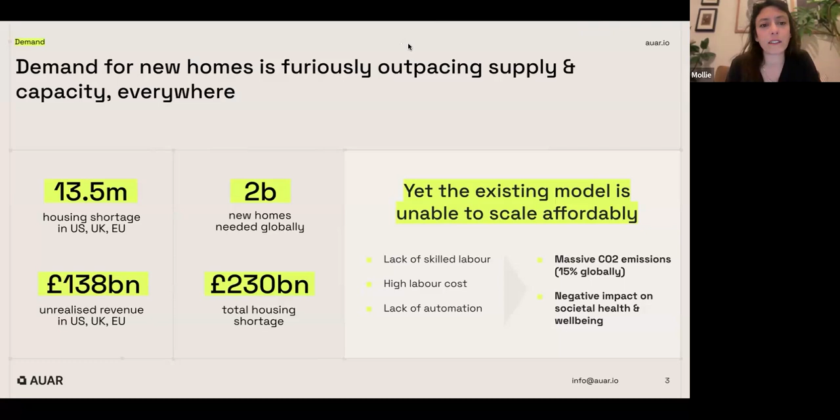And what that results in is known problems around CO2 emissions in residential construction, but more broadly, the problem around the social sustainability in terms of societal impact, societal health and well-being, and the impact that this housing shortage has.

And then if we look at solutions that have been kind of big promises to the industry, but have failed and have had billions and billions of pounds or dollars invested in them, we can look to the large modular centralized factory as a model that we're directly positioning ourselves against.

And the primary problem really with these kinds of approaches where you have a large modular factory is that they have a myriad of reasons for failure, but the ones that we've identified as some of the biggest problems are that they have a very, very high capital expenditure attached to those factories. They cost a lot to set up, and they also cost a lot to run.

And then if you look at the outcomes from these factories, you see zero cost savings in comparison to traditional methods. And part of the reason why this is problematic is because the business model for these factories requires a very standardized pipeline to be run through them, but also a continuous pipeline in order to meet the needs of those OpEx and CapEx overheads. And this is obviously in a kind of direct contrast to the construction industry, which is cyclical and in a way very agile already in that it adapts to changes in supply and demand.

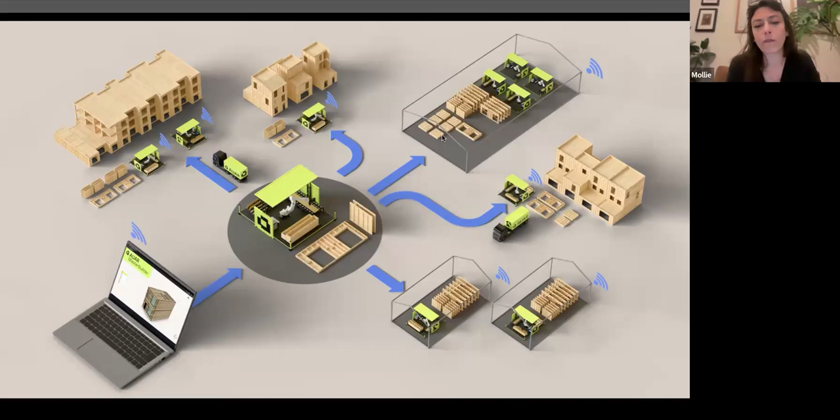So I'll go into these aspects of our business in more detail, but essentially we've developed a software approach that powers a robotic microfactory that can be deployed in small infill factories or in larger factories, or can be deployed directly on sites, allowing our customers to be able to adapt the financial needs of their business to the way that they develop and build, which we think is a really agile way of delivering homes in relationship to the more normative ways and much more in line with how the industry operates.

So our software and hardware solution is really a full value chain automation solution. We have a software platform called Master Builder, which is a cloud-based platform for design to manufacture of timber homes that then creates the manufacturing data for our robotic microfactories, which is a plug-and-play microfactory, and rented to our customers in a kind of no capex business model where they essentially pay us a per square meter or per square feet fee in order to operate those microfactories, and has a very low OpEx. And I can go a little bit more in detail about exactly what that means.

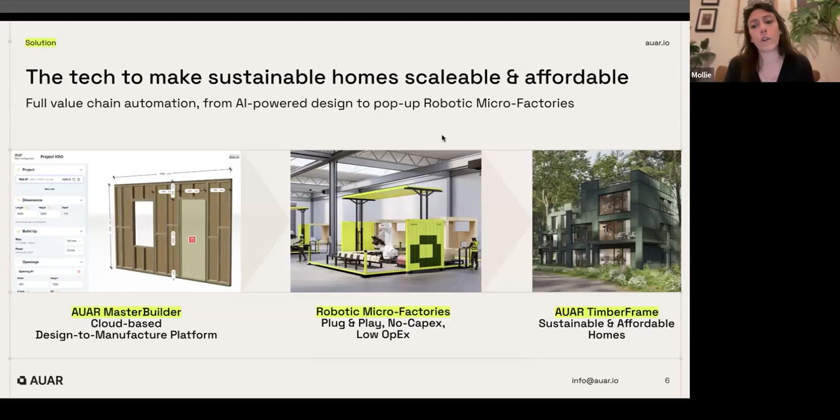And the result of that is that our customers are able to use the backbone of all of this, which is our approach to timber frame construction, in order to deliver really low energy or net zero homes that are also affordable and kind of aggressively below market cost. So I'm just going to show you what Master Builder looks like.

So Master Builder, currently we're the internal users of Master Builder, and essentially Master Builder has a couple of parameters that feed into it. One is our building system approach to timber frame construction, which you can see some of those defaults being set there. And then it also takes in supply chain information from our customer supply chain to set a pricing template. And then it can be powered through this pricing template to be adapted to any kind of costing that's needed,

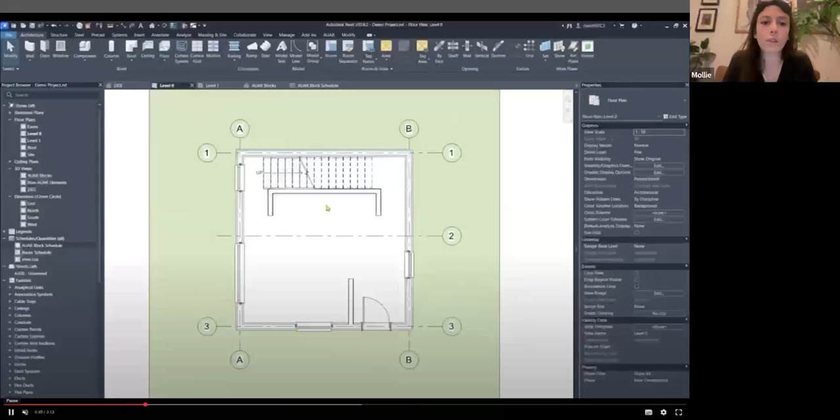and can be deployed into industry standard software such as Revit, for example, here, where essentially you take a design from an architect or a home builder with very baseline information, like minimal sizing that's been done. You can use Master Builder to then essentially have it tell you where in that design there are errors in terms of making this data that can be used to manufacture using our hardware.

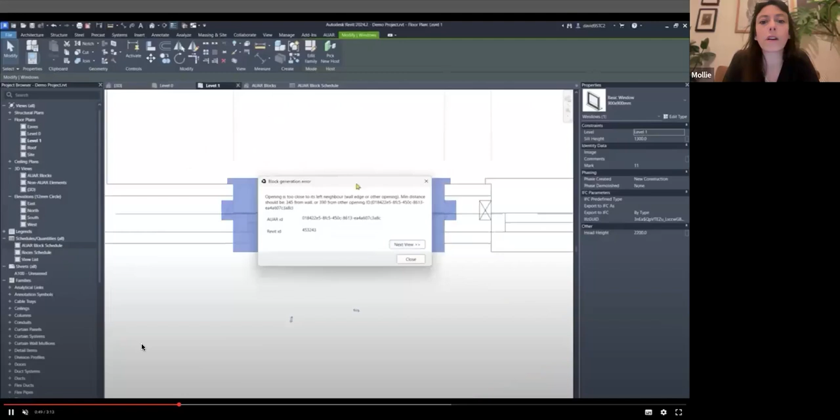And so, for example, here, Master Builder is telling the user that one of the openings is too close to its neighbor, and you need to adapt the design in order to make it into manufacturing data. We're at the moment pretty close to automating this optimization in real time and creating a list of optimizations that have happened after that's occurred. And then essentially what it's doing now is creating that manufacturing data in about 5 seconds.

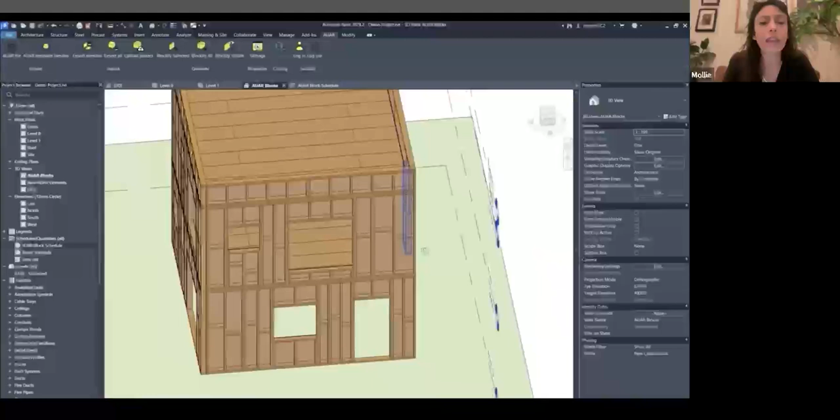So you can see here the timber frame is produced pretty much automatically, and it uses structural constraints as well as building code regulations for timber frame construction to be able to create that information. And you can see here the data that it produces in line with the building code assigned to it, the pricing template assigned to it in regards to the supply chain, as well as the structural and design parameters involved.

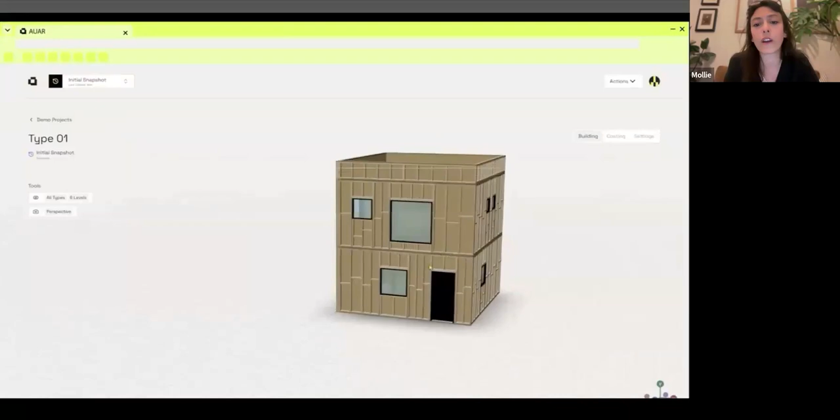And then that gets pulled back into Master Builder, where you can see there's a kind of product library of existing designs that we've been working on, and essentially creates that project, and it can exist forever in Master Builder as a product that can be deployed with a full costing, full bill of materials, building quantities down to the nail for that specific project. So you can kind of see that scanning through there.

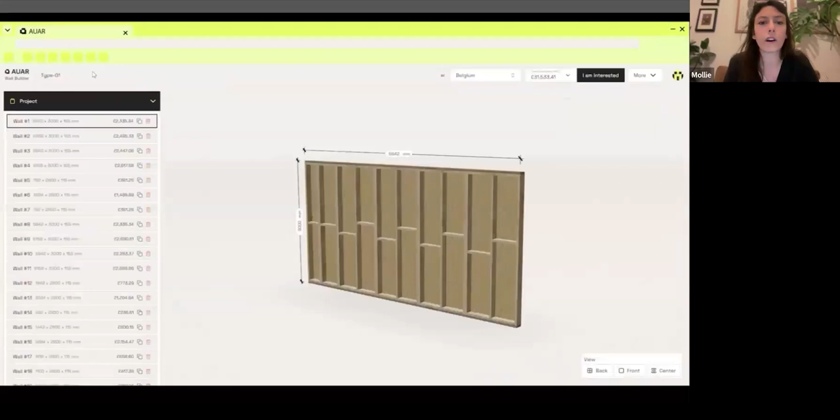And then you can go and get those building quantities down to the individual elements that are being created for the manufacturing data. And then you can scan into that on an even more granular level through a part of our microservices in Master Builder called Wall Builder. We can go in and adapt the design even more specifically to individual walls.

And I'll talk a little bit more about how we've used Wall Builder to start building an AI-ready platform later on in the presentation. And this is all with real costings in relationship to the supply chain for our customers as well, so they can see that in real time.

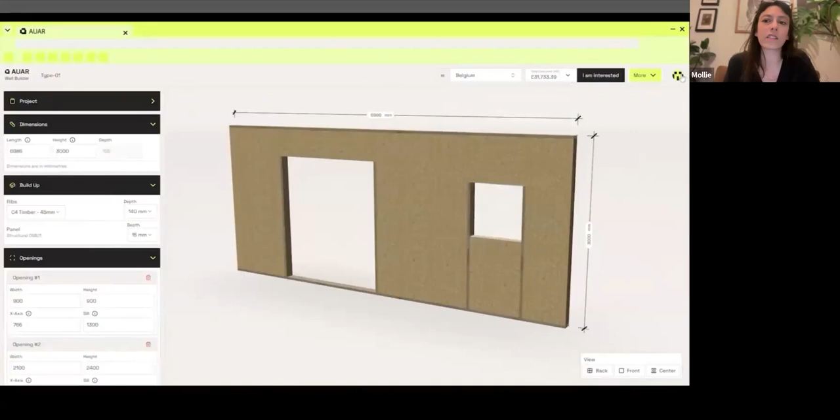And then importantly, the link here to the manufacturing is that this is all pure manufacturing data already. And so it streamlines itself directly to our robotic platform as well, which is going to just show you in a minute the manufacturing data that it creates, which is all code for the robot to operate and build that timber frame.

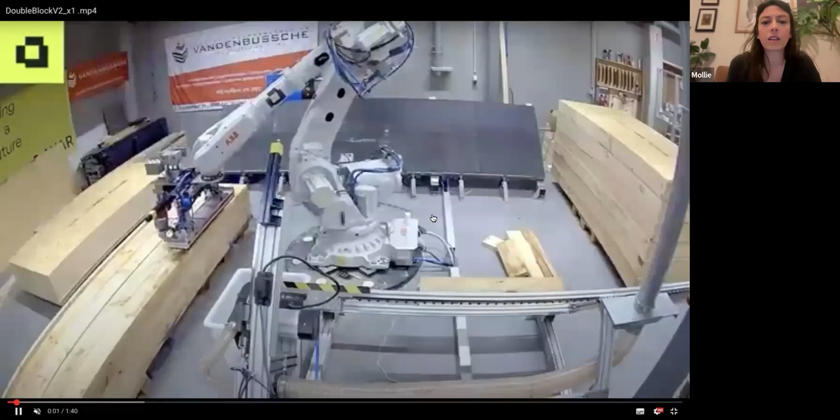And then when you go to the microfactory, so this is a microfactory that we've had operational in Belgium since January 2024. It was actually upgraded in September to this version, but it was operational prior to that.

And what's unique about this is that typically you would have multiple different production lines in a facility producing timber frame. For walls, you'd have a different production line for floors, you'd have a different production line for roof cassettes or roof trusses. And the microfactory integrates all of those elements into the one microfactory. So you no longer need all those different production lines.

And there's some really smart things that happen in the microfactory. So one of the constraints that we had is that it needed to be able to be used by someone with no robotics expertise and a very low threshold in terms of skills required. As a result, we need to be able to bake into the microfactory a degree of adjusting in real time to human fallibility.

So you can see here on the left, there's 2 stacks of wood. One is timber lengths, one is OSB sheets, and they are brought into the microfactory area, but they don't need to be placed precisely within the microfactory itself, which means that the microfactory has the capacity to understand where that has been placed and adapt its programming in real time. So essentially what the robot is doing at this point is it's scanned where those stacks are located, and then it adapts its program to understand what is the first piece that it needs to pick up.

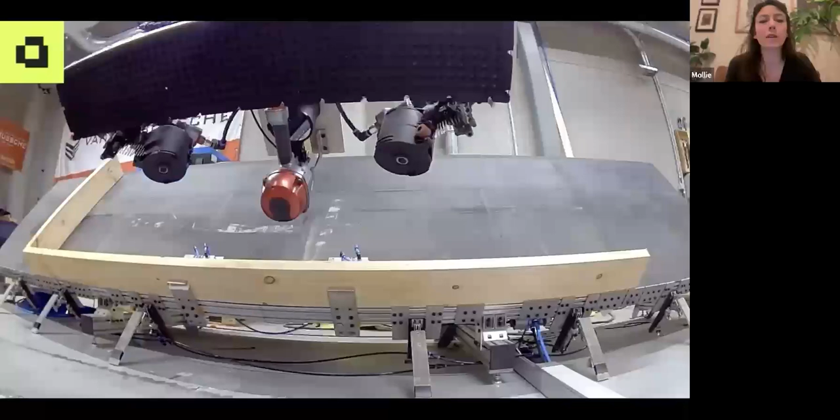And then in the front there, you can see a cutting machine that we've adapted so you get pure manufactured material in straight from the manufacturer with no pre-cutting needed. And then the machine will adapt the pieces that are needed. It will cut them to size, and it will store the extra material for later in the robot program, which means that it has a memory attached to it as well, so that there's zero waste or very minimal waste, like 1% material waste overall.

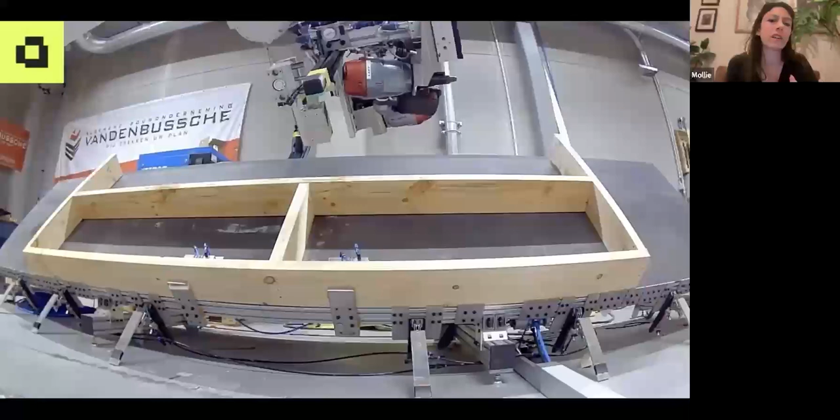There's also a couple of other smart things that happen within the microfactory on the assembly table. The end effector for the robot, which is essentially what we call a Swiss knife, has the ability to grip in multiple directions, pick and place material, vacuum material, and it also has the ability to nail material. And so it will calibrate the position of the material in real time.

You can see some of the material being moved into the correct position in order to create an ultimately completely precise element. And then it will pick up that last sheet and nail it into place as well as nudge it into place. So there's no need for manual human intervention once it comes off of the assembly table. So all together, the robot arm, the end effector, the assembly table, and the cutting machine make one complete robotic system that requires no human intervention except for bringing material in and taking material out, and essentially can work for as long as there's a stack of material in place.

And what this means for our customers right now is that one microfactory can produce the floors, walls, ceilings, and roofs for 120 homes a year. It can produce one house in one day, and it requires one operator for less than 2 hours of one shift, which means that one operator can operate 4 to 5 microfactories at any one time. We currently have a 12-week lead time from the moment that a customer places an order for a microfactory to the point that it's delivered and ready for production.

And then in terms of our timber frame approach, we're able to guarantee up to a 70% reduction in manufactured cost of the timber frame panel itself. And when you look at the overall building cost, we address right now 20% of the building cost directly, but we have ripple effects across up to 60% of the building costs because of the way that we engineer assembly sequencing, time on site, et cetera.

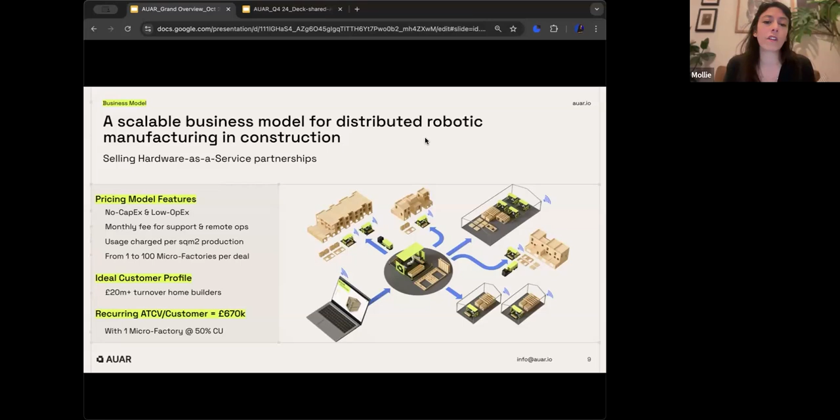And what that means for us is that an average annual total contract value per microfactory per customer is around 670,000 pounds if it operates 50% of the time. So just to give you a little bit of insight of what that means for our business, if you are able to produce 120 homes with one microfactory, which equates to about 44,000 square meters of timber frame a year, we get that annual revenue.

We're on average using per customer 5 microfactories, which means that we need about 75 customers to do about 210 million in annual revenue with a pretty significant gross margin that looks like we're hitting around software as a service-based margins, but with a hardware business.

When you look more closely at the microfactory itself, we see the microfactory lasting about 10 years. On average, we're deploying it twice over that time. We ask each customer to pay a setup fee of around 100,000 pounds. And essentially what we've been able to achieve in terms of the expense to us is that the hardware for one microfactory costs 100,000 pounds. The robot itself costs around 50,000 pounds, but we lease that from a third party, so it's a very minimal cost to us, and it costs us about 25,000 pounds to deploy just one microfactory over its lifetime.

One of the important things that we do with our customers is develop business cases, which has a series of different assumptions baked into it. So one of those assumptions as a baseline is that our customers will run an 8-hour shift. In reality, they run around 12-hour shifts. But we also bake in that they'll use one microfactory at a maximum of about 80% of the time across that 8-hour shift, that we need less than 2 hours from one operator, that we're working 230 days a year, and we directly input into the business case the square meter material cost directly from Master Builder.

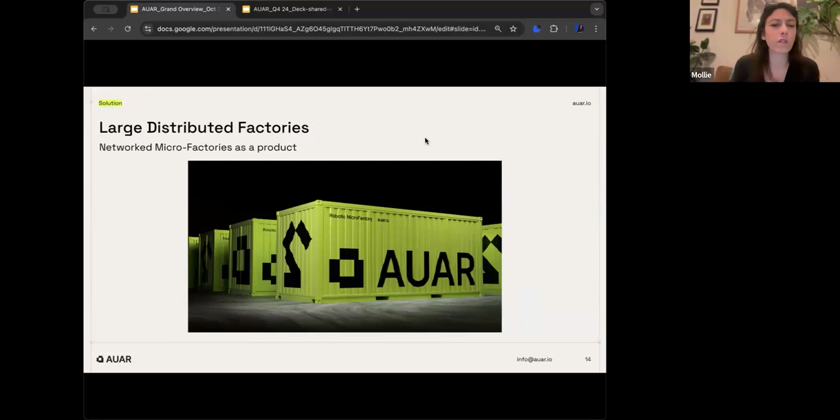This is just a repeat slide, sorry.

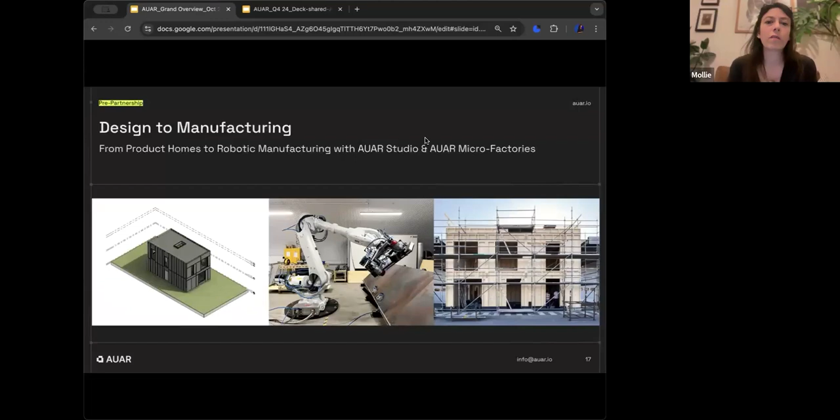And so really our proposition is that we essentially are that design to manufacturing replacement for home builders, where we're able to develop product homes with robotic manufacturing with AUAR Studio and our microfactories. Right now, we're able to enable our customers to deliver 1 to 3 stories, single family and multifamily, 4 stories in the US actually. And then we're moving very rapidly to being able to offer up to 6 to 8 stories, depending on the market.

We won Innovate UK, which is the government agency for innovation, a couple of months ago to fast track that development this year. Whereas we previously had anticipated we would only be able to start offering 6 to 8 stories mid-rise multifamily in 2026, we'll be able to offer it by the end of this year.

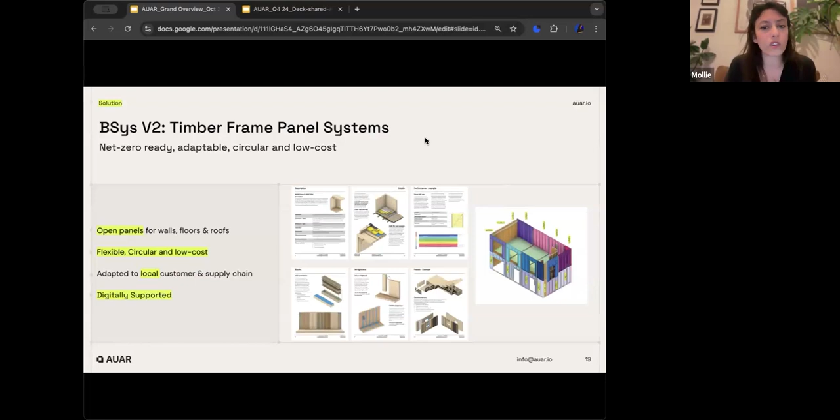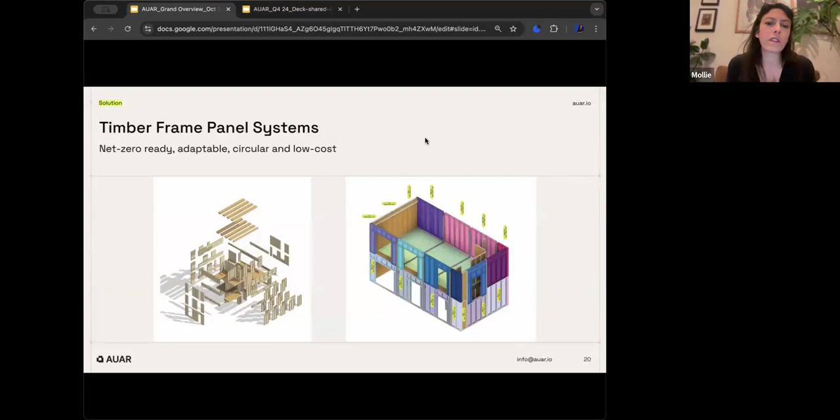So the power behind AUAR is really our approach to our building system. So we are able to produce open panels for floors, walls, and roofs, which are flexible, circular, and low cost, so they can be adapted to any design constraints and adapted to our local supply chain. And essentially what that means is that we are using some of the intelligence behind Master Builder to develop assembly sequences and full timber panels that have openings embedded already in them, which if you have any experience in timber panel construction is something that's quite a unique differentiator that AUAR provides.

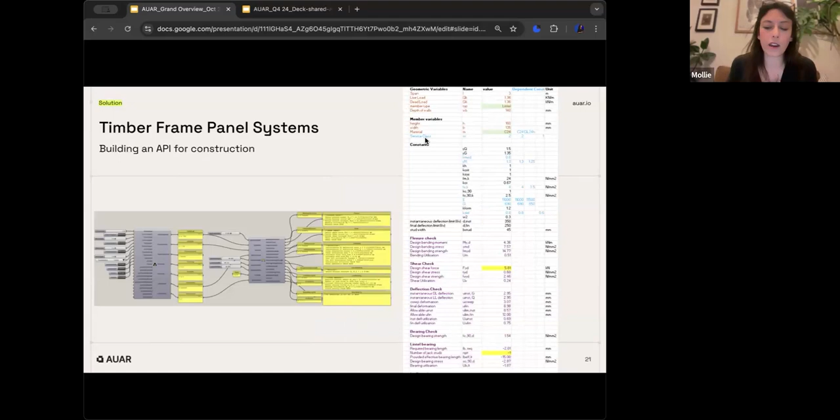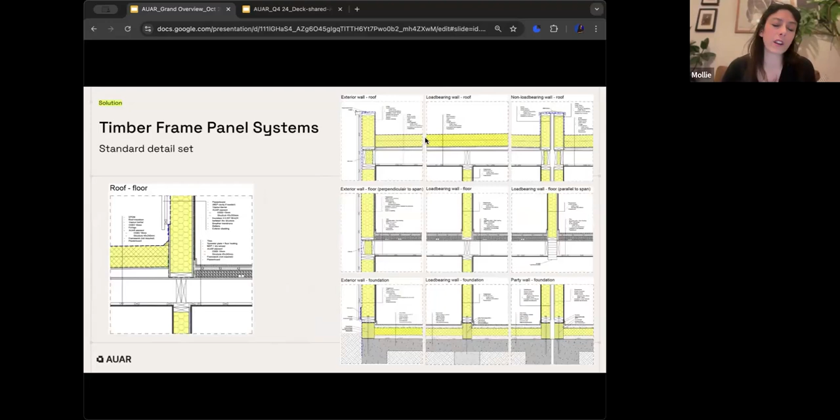And essentially what that means is that we've developed our building system entirely in Grasshopper. This is actually a very old image. So it's now become really a codified version of timber frame construction that can be deployed anywhere across Europe and North America. So it's just some of the standard details. Essentially what we create is code, but it gets deployed as readable drawings that are normative for the industry.

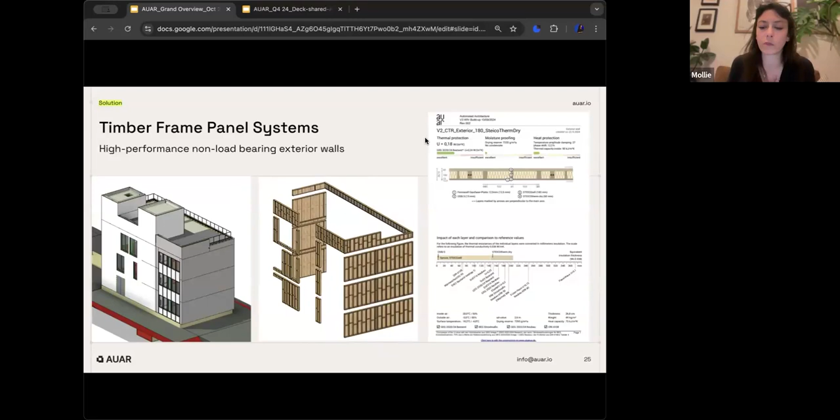I'll tell you about this project a little bit later, but one of our kind of secret sauces in AUAR is that we can deliver the entire home, but we can also deliver non-load-bearing exterior wall panels as well. This is a project that we did in Belgium. I'll show you a little bit about this later on.

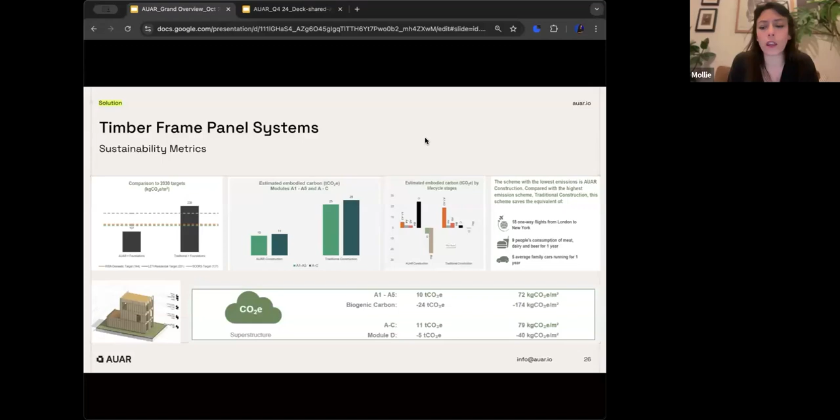And then we've recently finished an LCA for a template AUAR 3-bedroom house, which shows that we are essentially a carbon sink in each home that we build, where each home sinks 24 metric tons of CO2 just in the timber frame alone.

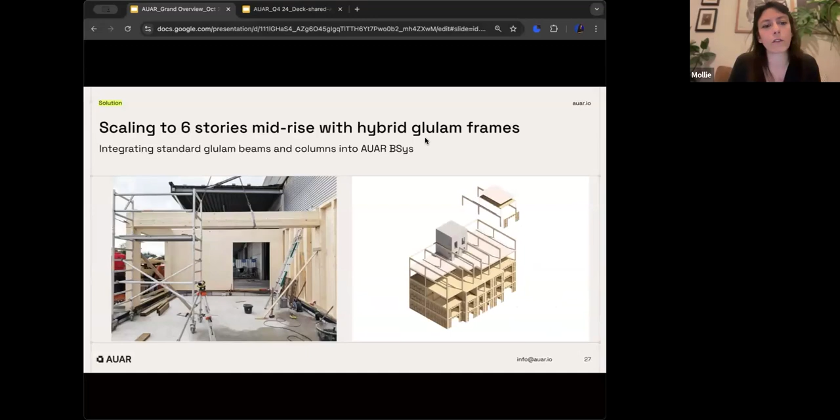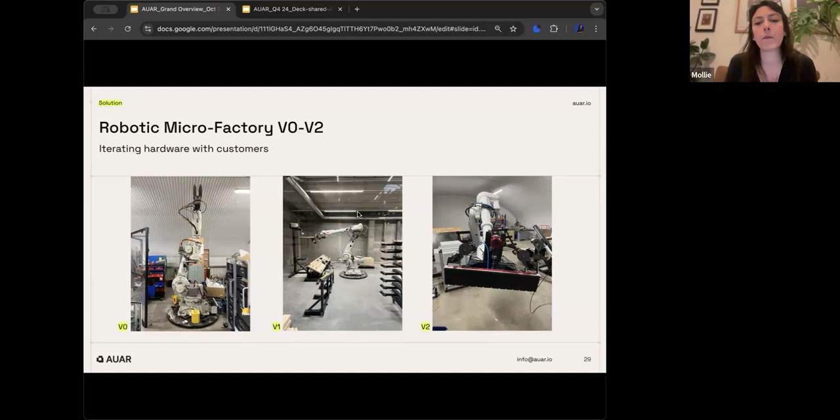We moved that towards V1 in January 2024, which required that we had pre-cut wood put onto a physical shelf. In the microfactory at that point, we were still using glue as part of this process. And then in September 2024, we deployed our latest version, V2, which we also shipped out. We built 4 and we shipped out 3 to customers.

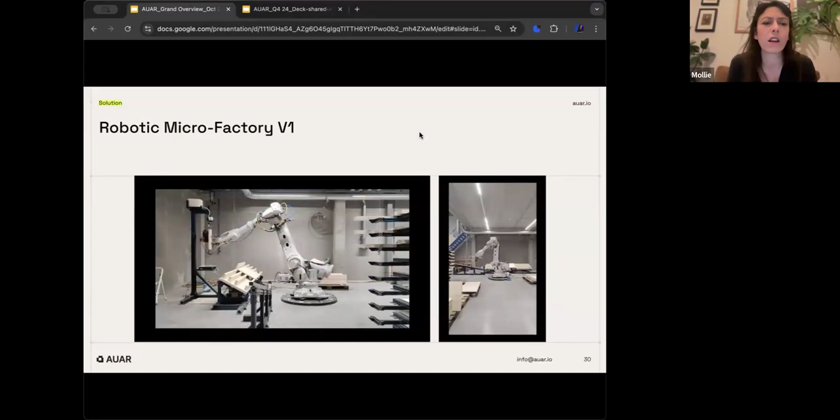So you can see here that original version, where the operator was required to stack the physical shelf. It then calibrated the position of the wood. It had only 1 nail gun at the time as well, and the glue process and a very small assembly table. So in this configuration, it could only do wall panels that were 6 meters by 2.4 meters long. And we're now able to do a much larger panel that comes out of the microfactory itself.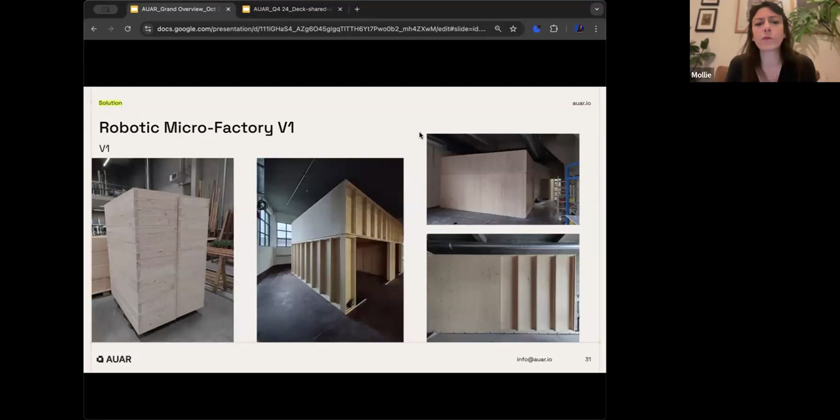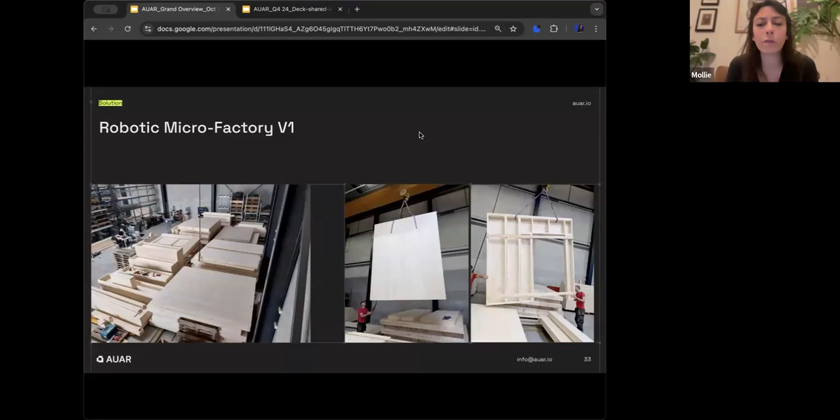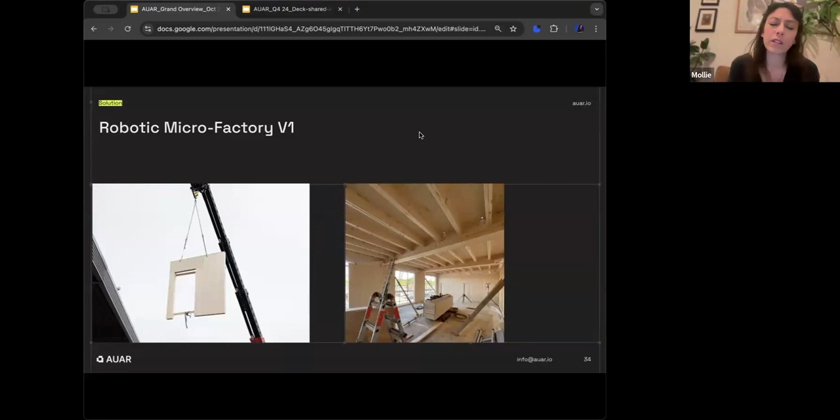With that first microfactory version, we delivered an interior fit-out project for a tech hub in Ghent in Belgium. And this was really just to validate the performance metrics around the microfactory itself. We then iterated to a much larger structure. So this was all of the panels that were produced for a 2-story house prototype that's being used as a warehouse office by our partners in Belgium, and was delivered on site with that hybrid glulam one-directional system in September of 2024.

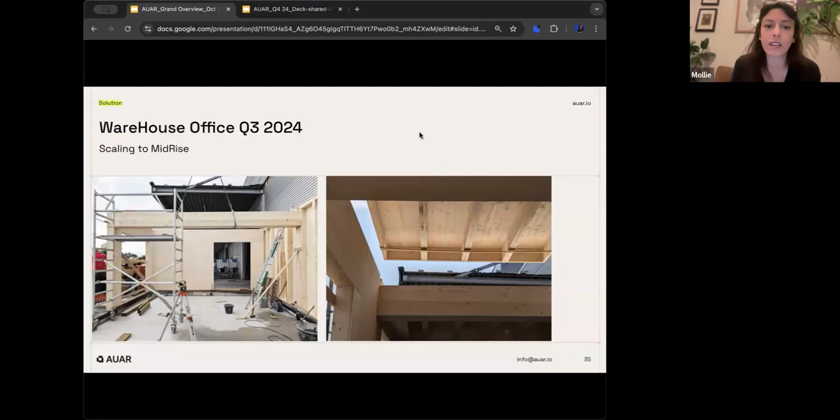And it was built on site by 2 guys that had no expertise in timber, had actually never worked with timber before, in less than 5 days, with quite a lot of tricky things that we forced them to deal with. So, for example, you can see here that there's different sizes of windows. Those windows are offset. On the side of the building on the right, which you can't see here, there was also a window that went across 2 stories.

So we tried to make our lives difficult in some ways as well to demonstrate that we could get that variability in what came out of the microfactory. You can see here that 2-story transgressing window.

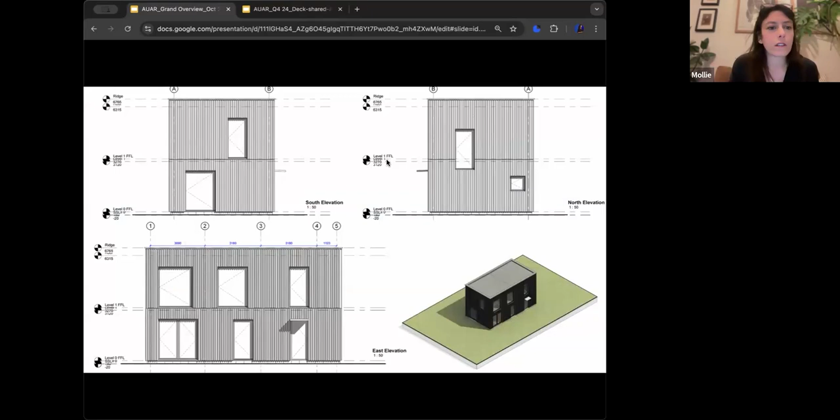So V2 became a much more complex machine in terms of how it was a robotic system. So again, it has an ability to shoot nails in 2 different directions, has an ability to pick up sheet material, and it has an ability to grab material from 3 directions. And what that means is that we can now produce timber frame panels that are 1.2 meters wide by 4.8 meters long, which means we can do an entire floor slab for a typical house.

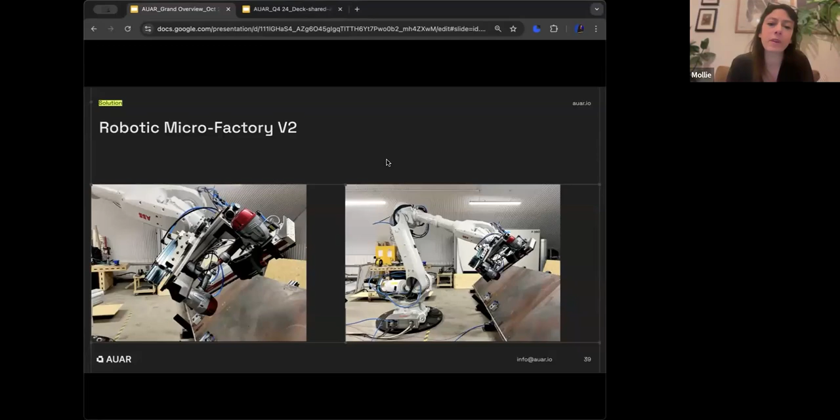And one of the things that we're examining now is just how big does that assembly table get? So we're looking at it as though it's very likely to double in vertical height, but stay the same width as 4.8 meters, which means we can do entire walls rather than slices.

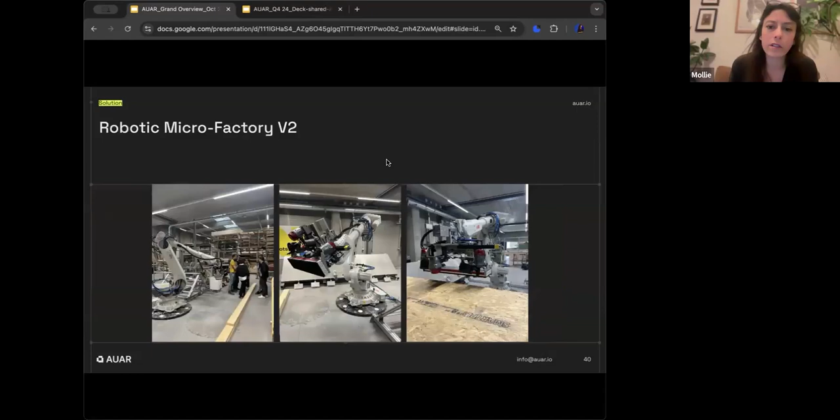This is just that microfactory being set up with one of our automation partners, ABV Robotics. They're in their UK headquarters, but they're a global company. And then we shipped off 2 of those, just like this, to the US in September of 2024. And they're being installed now. My team's actually flying out this week to do the installation and go into production pretty rapidly in April.

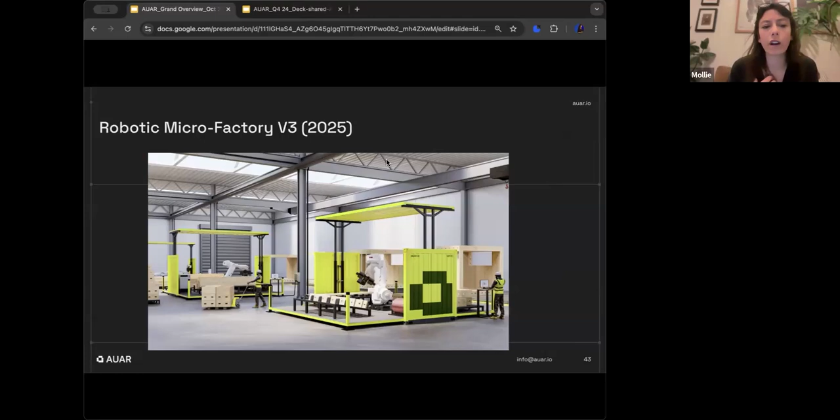We're moving now towards this containerized version, essentially where we calibrate the microfactory before it gets sent out, which reduces our overheads and OpEx expenses in setting it up, and means that we can really pop up almost anywhere with the microfactory itself.

One of the important things here is that we can have real-time simulation, so we can real-time adapt the designs as needed and change the production cycle as well, and have very clear instructions for the operator of what they need to do, which means that they don't require any robotics expertise in order to operate it.

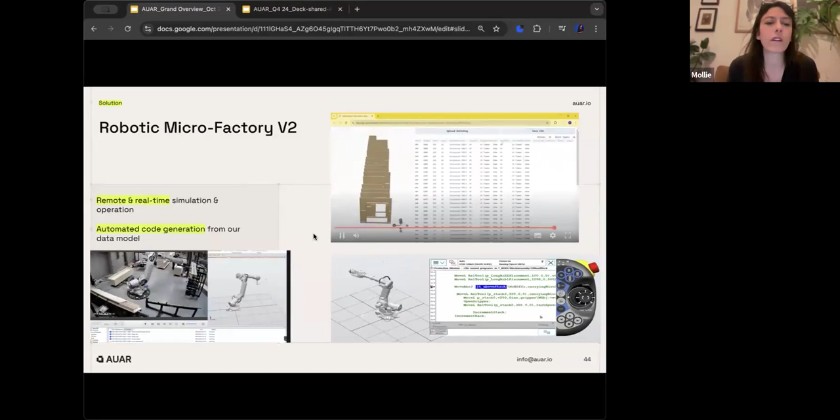And one of the important things here is that we've simulated this entire process so that we're ahead of the targets for what most timber frame manufacturers would produce in terms of the square meter speed per week. I'm going to skip that.

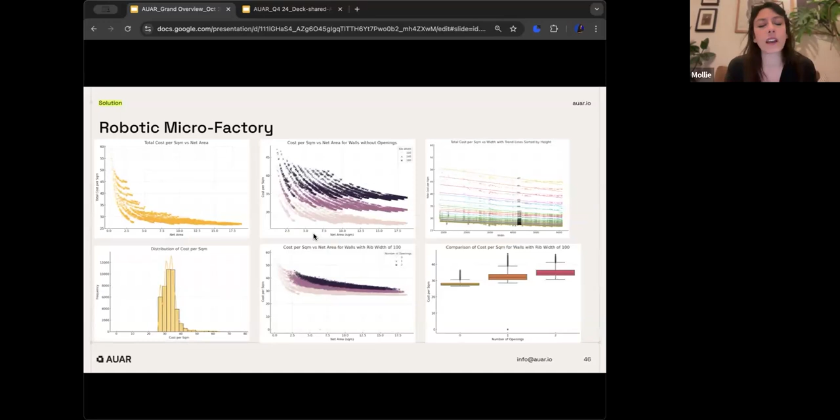Another fun thing that we are constantly working on is trying to find what is the ideal panel size for the vast majority of the homes that we're developing. So we did a kind of massive analysis of 20,000 different kinds of walls and the cost metrics attached to them last summer, where we were able to essentially find this really happy middle section of walls that are used in 80% of all the homes that our microfactory is producing.

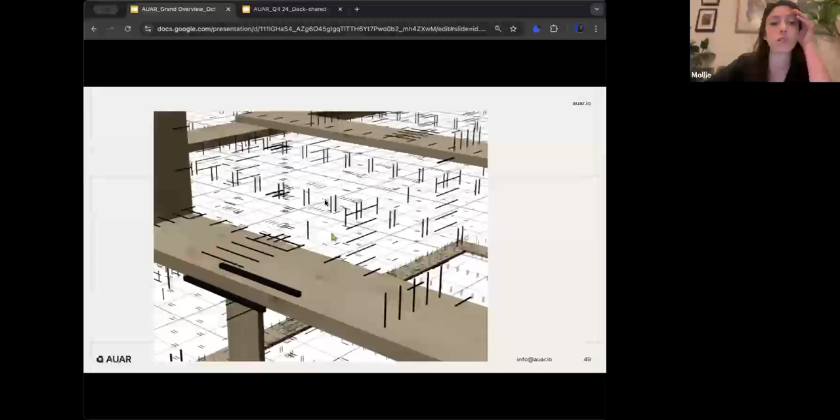One of the things here is that because Master Builder is directly connected to the building code requirements for a specific market, we're able to simulate down to the very nail the position of all of the parts and components that go into a timber frame panel as well. Oh, it's Master Builder again.

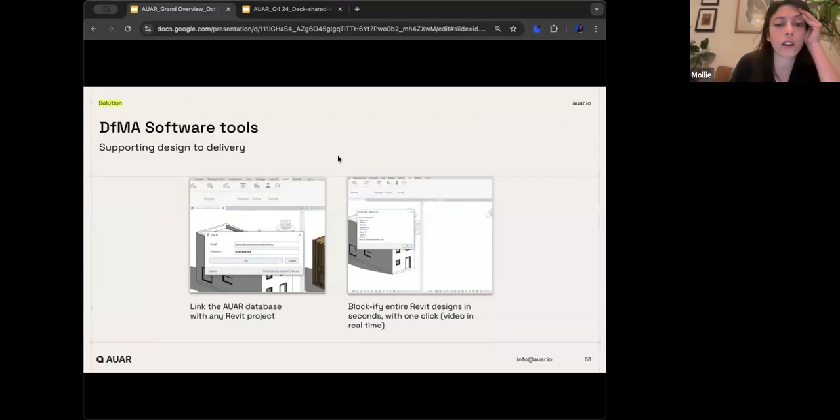And then also importantly here, we've linked that database with really any Revit project, and we can blockify what we call essentially that translation into manufacturing data just with one click rather than requiring a user to go through and do any custom coding.

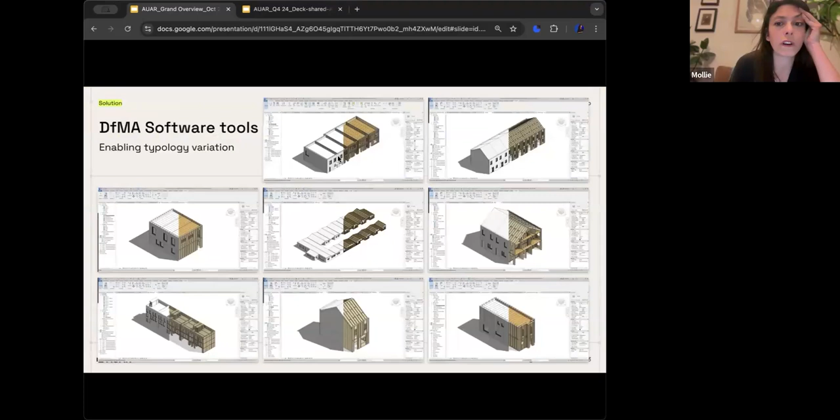Some of the typology variations that we've worked on, you can see here. So we are doing everything from single family homes to larger developments, row houses, whatnot. And then also doing some of the structural analysis that's needed in the sizing.

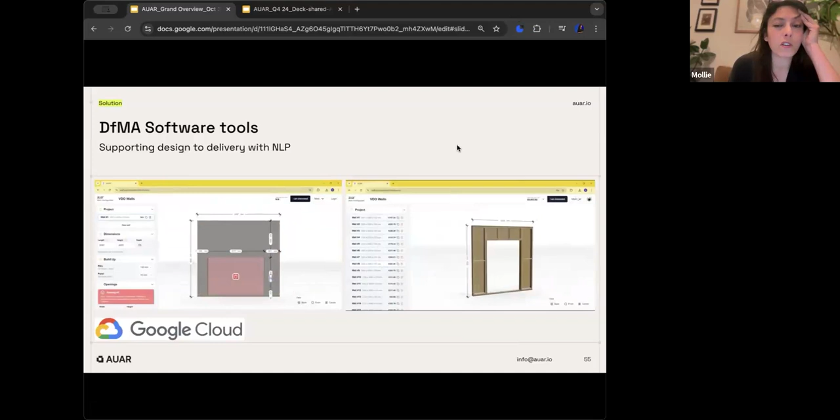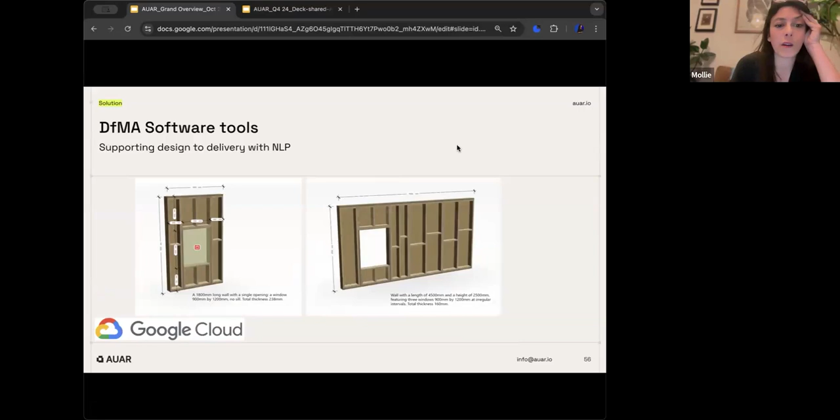One of the important things that we've done with Wall Builder is that we had a partnership with Google Cloud in the middle of last year, where essentially what we did was we used prompt engineering to have an AI learn from the JSON files that are produced in Master Builder so that it can automatically produce homes using natural language processing, essentially meaning that if you say, I need a wall that's 1,800 millimeters long with a single opening, this is where it needs to be spaced,

it will automatically produce that as well, which means that we've had quite significant milestones in being able to make this an AI-ready platform so that we can automatically generate with AI all the components that are needed in a wall and make them ready for fabrication.

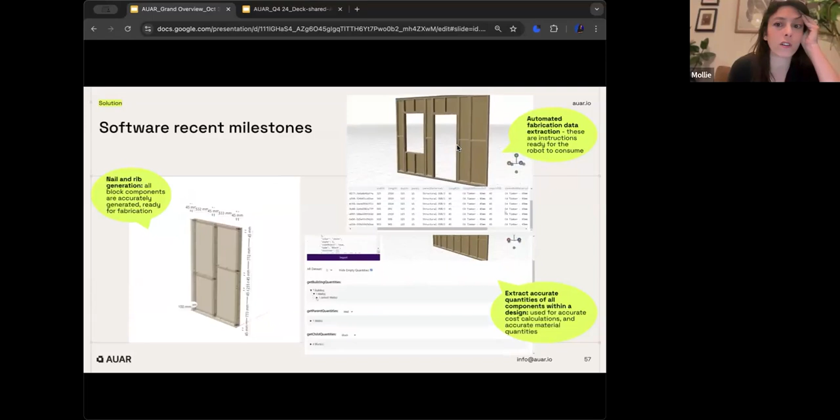We can also automatically generate all the instructions that are ready for the robot to consume, and from that we can extract all the quantities within a design as well. What that is leading us to is that we've done the lower left already, where we can automate requirements gathering to generate the elements within a house.

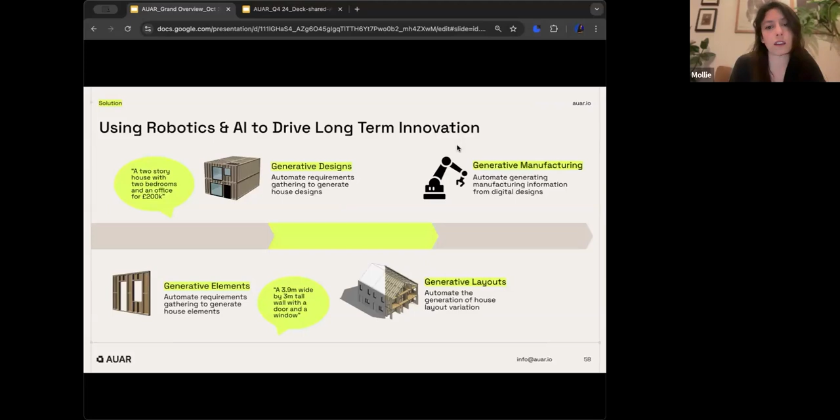We're moving very rapidly this year to being able to automate the requirements gathering for generating entire designs. That will move us towards generating the layouts and variations on those layouts, and then link it back to our generative manufacturing platform. So these are three kind of template homes that we've developed within the platform itself that are fully costed and can be adapted by our customers to their specific site and their specific budget.

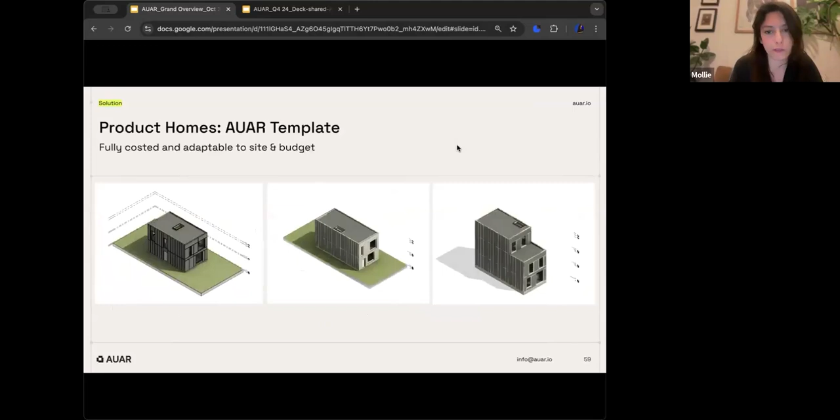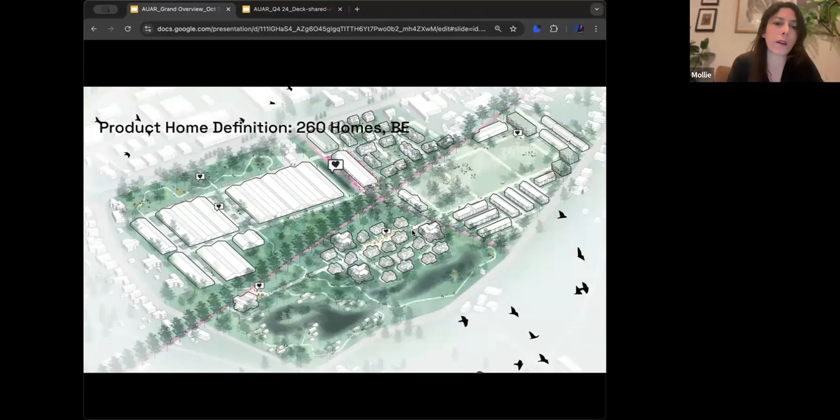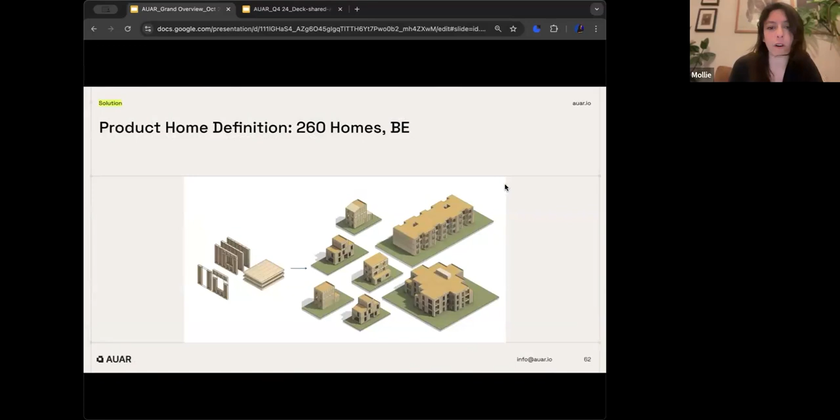We've done that with a 260 home project last year in Belgium, where there was some existing ex-army barracks, but 260 homes in both single-family houses as well as low-rise apartment buildings. We essentially gave the architects that we worked with, three architectural practices on this project, a set of design parameters, and asked them to make a variety of typologies, which you can see on the right-hand side of that image there. And it's kind of a great Cambrian array of everything that they produced there.

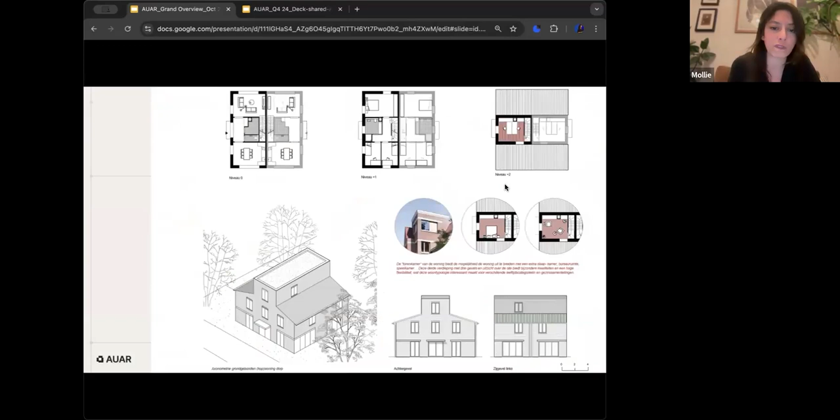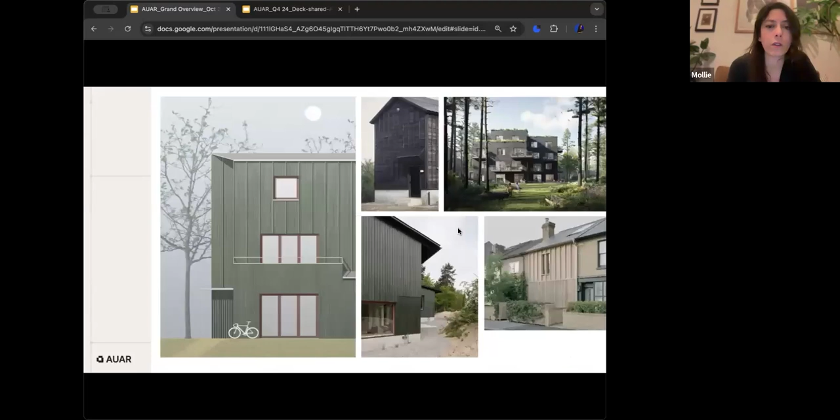And what's unique, I think, in our approach is that we're agnostic to how a building appears in the world. We have our own aesthetic that we like for sure, but ultimately, in order to really solve the housing crisis, you need to be able to be entirely localized, which means you need to be agnostic to how a building is finished. So in this case, there was a brick finish on this duplex type. And then the low-rise apartment, you can see, a more typical low-rise apartment. And then the single-family houses also having a kind of timber finish.

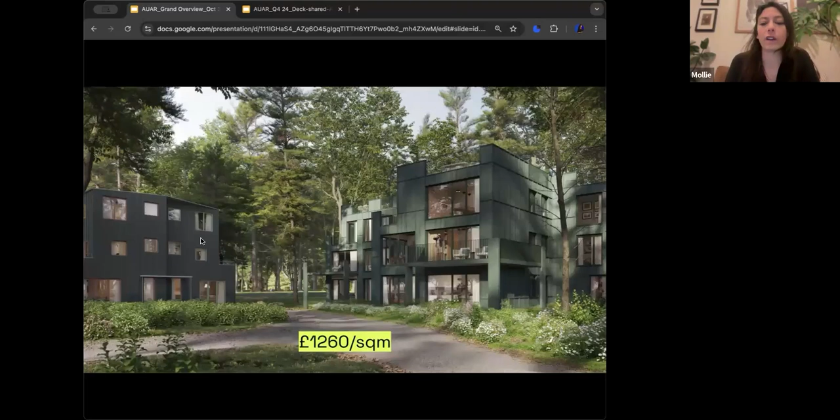And what's important here in terms of what we were able to achieve as a construction team is about 30 to 40% lower square meter cost than what you would typically get in the market. And I think what's interesting about this image is that the underlying system behind them is exactly the same. It's just the way that they appear in the world is very, very different. And this is the cost down to door handles and the greatest detail that you can get, basically.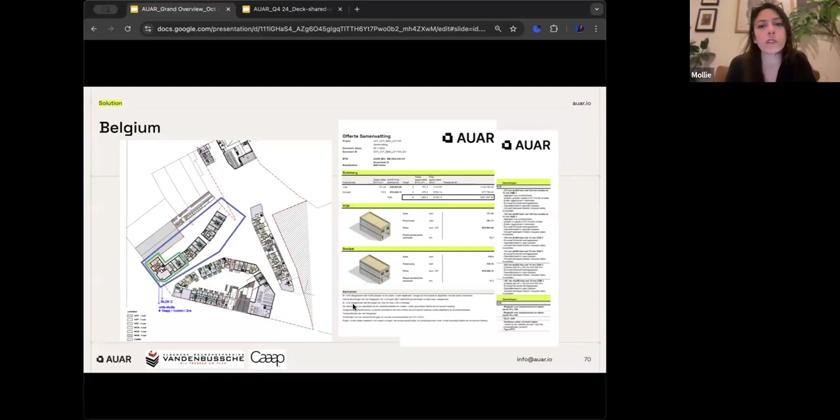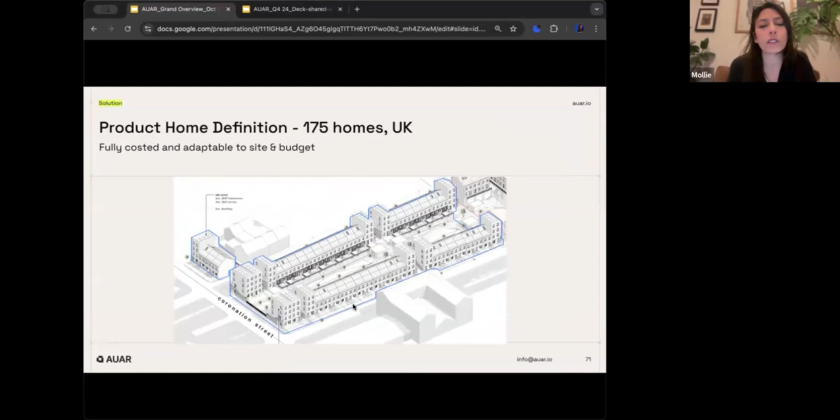We're pretty aggressively working on developing pipeline with our partners. So this is a project with a developer and our microfactory partner in Belgium that we're working on. We're also working with a sustainable developer in the UK for 175 homes. We've also done some development for a social housing bid in Belgium, which once we've won the bid to be on the procurement platform, we'll be able to deliver those homes across a specific area of Belgium with our partners there.

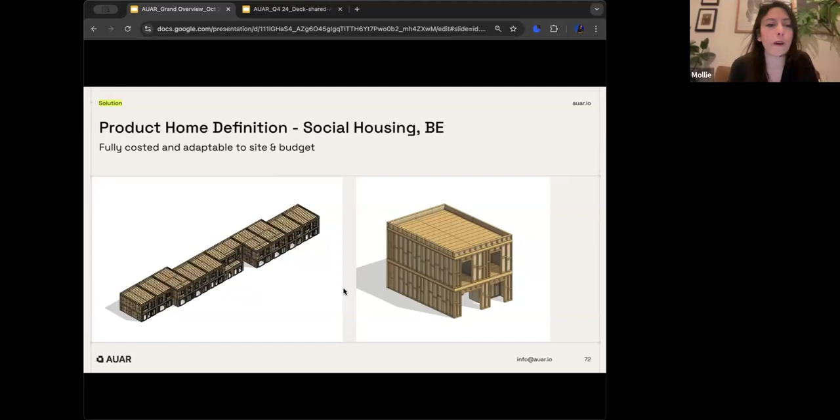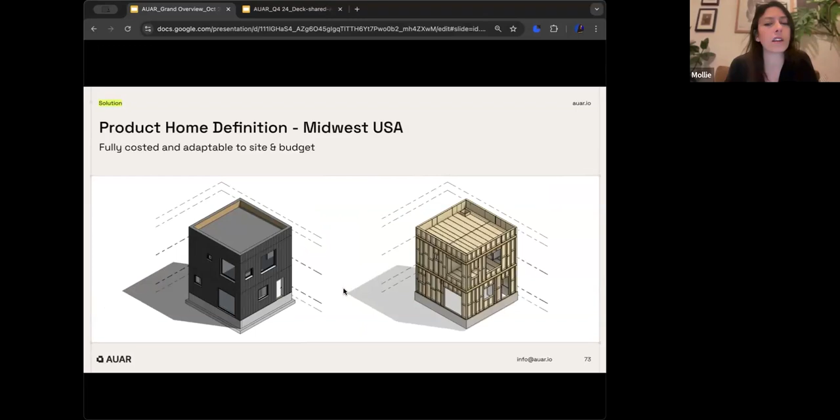This is a small ADU that we developed for our partners in America, in Indiana, which is able to be stretched and adapted to be either a single-story ADU, a two-story ADU, or a much larger single-family house as well. And out of everything that we did in the second half of 2024, these are all the different building types that came out of Master Builder.

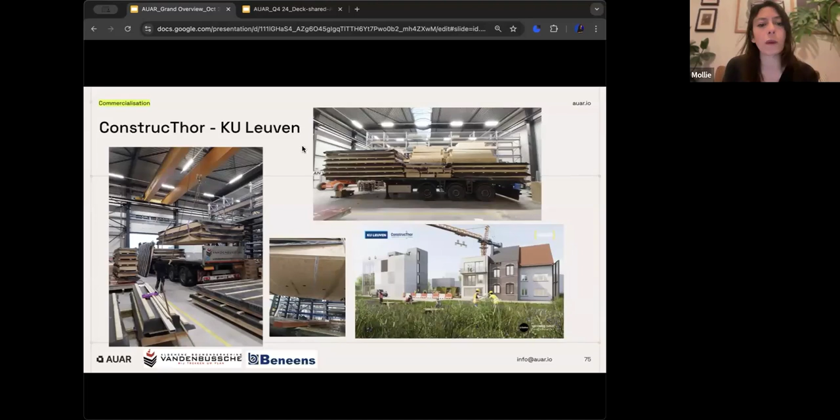One of the things that we also did, we're about to have a really big press release come out on this project, but this is an external facade project I mentioned earlier for KU Leuven, which is a university in Belgium that has won EU funding to set up a circular construction hub. And part of that is the adaptation of an existing precast concrete and steel structure into the main hub of that project, which is called ConstrucThor. And we delivered the closed wall panels for that project in December, and it's being completed now.

This is a project we're working on with a developer and our microfactory partner in Brussels, which is basically an entire city block just of the external facade panels, similar to this project. And then in the UK, we're working with two developers, one of which is the developer I mentioned earlier with the 175 homes, called Town.

We've also partnered with Bywater, which is backed by Sumitomo Forestry, and they have a £4 billion remit to invest in sustainable timber homes across Europe. And part of that is a partnership with Donaldson Timber Systems, which is the largest timber frame producer in the UK.

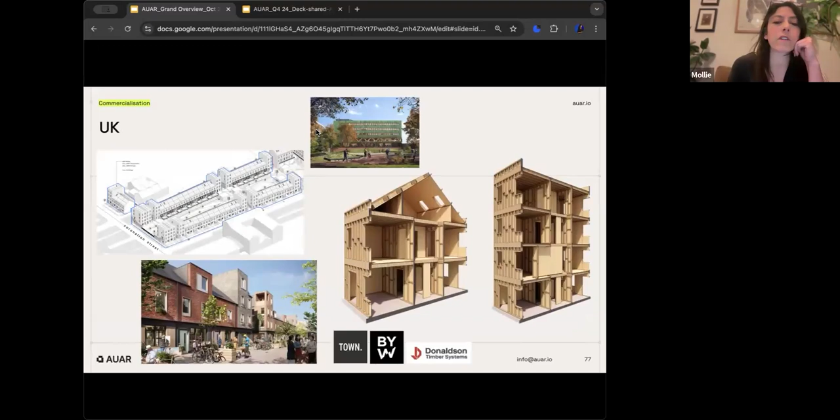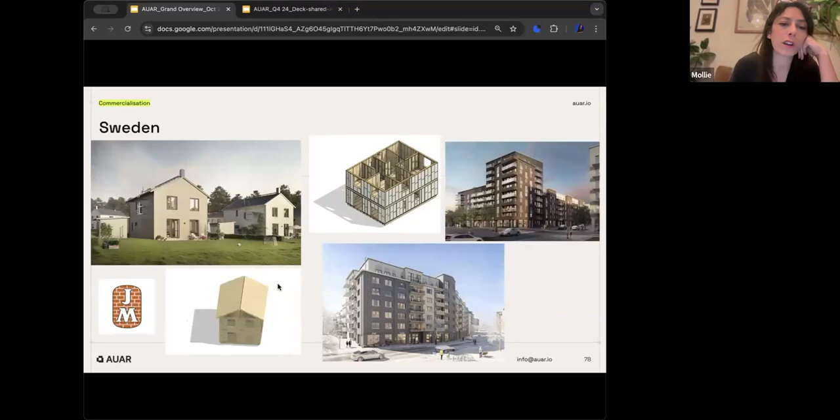They do about 10,000 homes a year for the home builders out here. We've also partnered with one of the largest developer builders, like integrated home builders in the Nordics. And we are delivering a microfactory to them in May, first doing wall panels by the end of this year for a couple of different projects, and then graduating to a single family house, and then towards mid-rise in mid-2026. And we're also rapidly signing customers across the States.

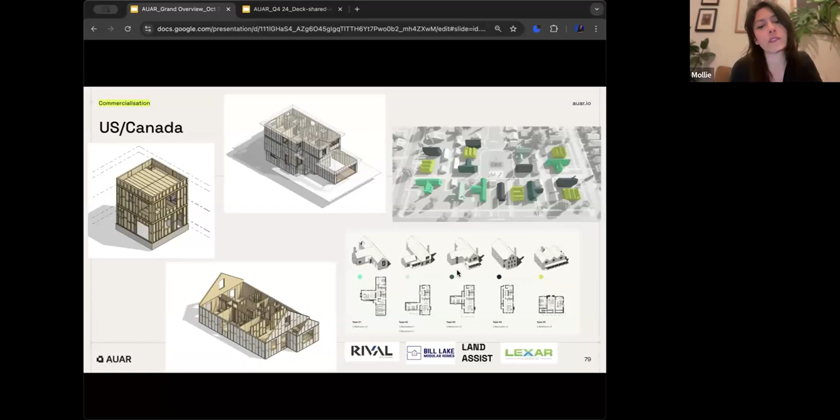So this is just some examples of some of the typologies that we're working on with those partners down in the lower right-hand corner, from single family homes to entire neighborhoods. And so, yeah, we're really busy at the moment. So we're adding 10 microfactories this year. We're lining up 25 more commitments. We had a really busy end of 2024 where we did a couple of strategic press releases, and that created a kind of 25 times growth opportunity.

And one of the strategic things that we've done over the course of the last couple of years at AUAR is we've gotten on board a couple of strategic growth partners. So one of those is ABB Robotics, one of the largest robotic arm manufacturers globally. They've actually been our automation partner since 2021. We had our very first test factory with them in their UK headquarters in 2022, and now we work with them really closely on deployment in the US. We also have a partnership with Holcim, one with Sika, and we're part of this group in Europe called Built by Nature, which is supporting the advancement of timber construction across Europe.

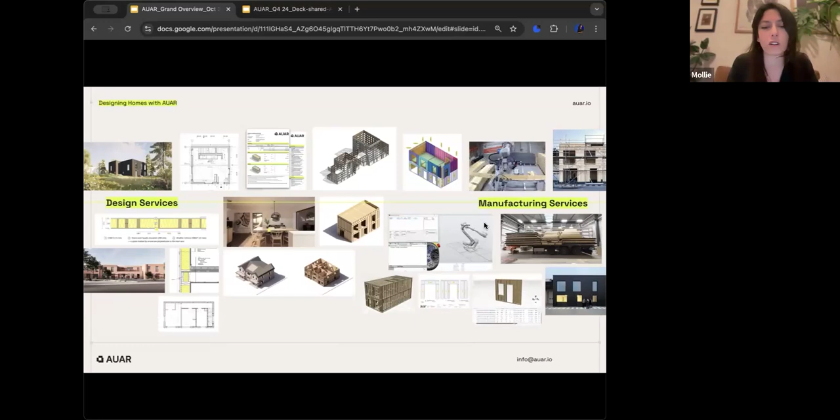So yeah, we interestingly are starting to separate out the services that we provide. Of course, the core one for us is the HaaS service model, which is the full value chain integration from design to manufacturing. But we're also separating out to customers. Design services is one side of something that we offer to a customer, as well as manufacturing services, or a mix of design and manufacturing, but maybe not the full entire stack.